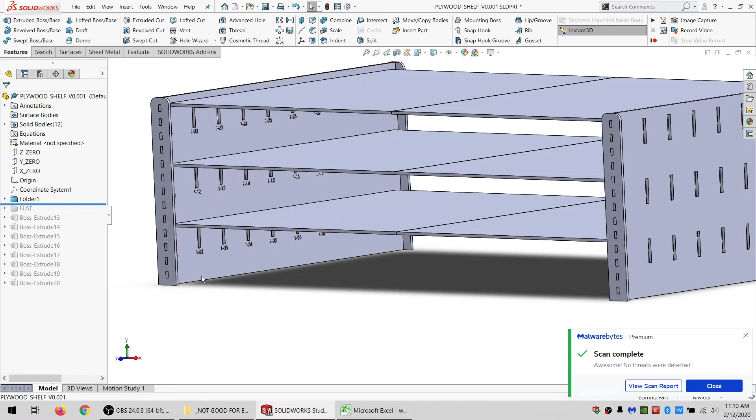is that all these little holes have wood slats that I bought from the hardware store. They sell them as quarter inch by 2 inch by 3 feet. Although there's so much variation in those that I actually had to adapt a little bit, modify my design. When I started measuring them, I realized there was really no consistency at all. Some of them would be off by 2 or 3 millimeters from one end to the next.

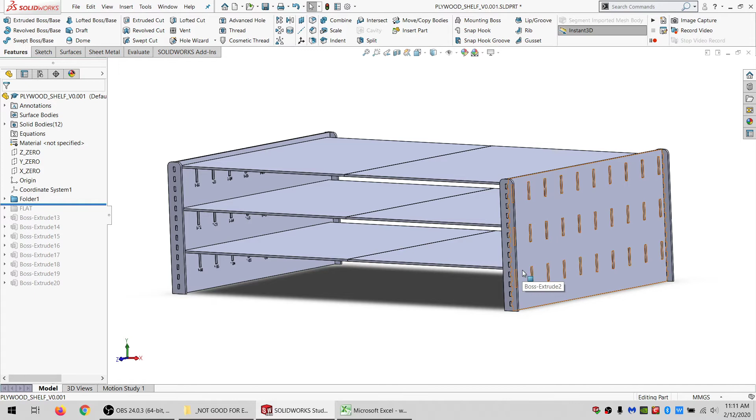And if I just put them all in there exactly the same, I'd have to make all the holes large enough for the largest one, which means the smallest ones would be super loose. And on top of that, the whole point is to create flat surfaces here for my plywood to sit on, and it wouldn't be a flat surface because some would be higher, some would be lower.

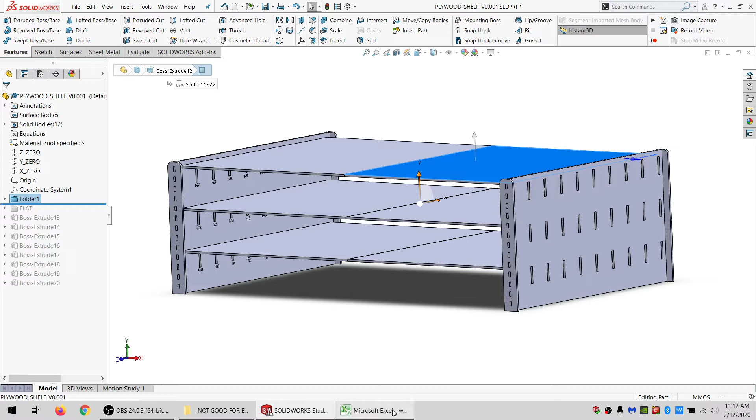So I went through with calipers, and basically I had 30 of these pieces, marked them all with a number, and marked each end. So each one would have, say, the number 5 written in the middle of it, and then on one end it would have a 1, and the other end a 2. And I measured the thickness and width of each end.

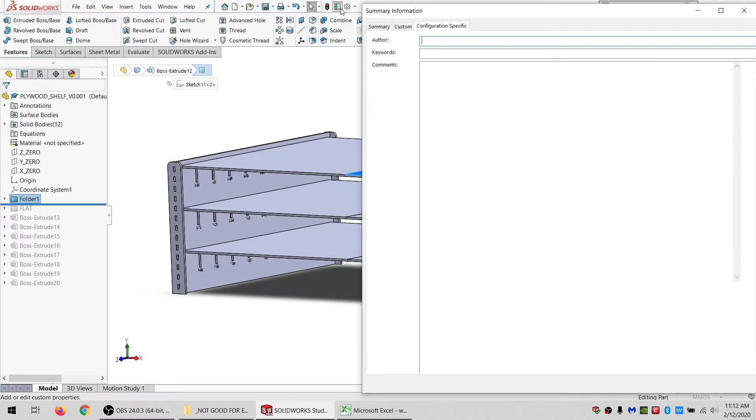And then I created variable names for each of those and stacked them up like this, copied that to Excel so I could easily copy it into SolidWorks. And now you know why I'm doing this as a review video. So I put all my variables in there.

I also added working height, which was the height from top to bottom of the existing shelf opening. Working depth is how deep the shelf was that I had to work with, although I don't even think I ended up using that. Kerf, obviously, just like the previous ones, so I could apply kerf in here rather than in the laser software that doesn't seem to ever do it right.

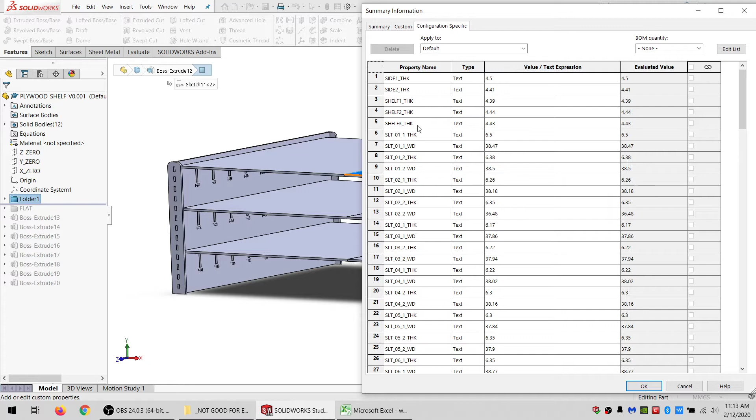And then I put thickness for the two sides and for each of the shelves, which are made of two pieces because my laser cutter isn't big enough to cut the whole shelf at once. And obviously, I'm trying to put pieces that are the maximum size for the laser cutter on top of the shelves, and the shelves have to be larger than that.

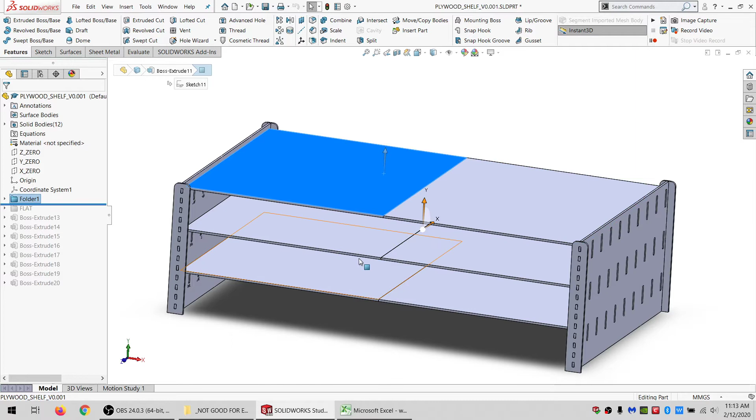So I had to go through my whole stack of plywood and find two that are the same height, or basically 3 pairs, each pair being the same thickness, which luckily I was able to find. And then the sides, it doesn't really matter if they're the same thickness as anything else.

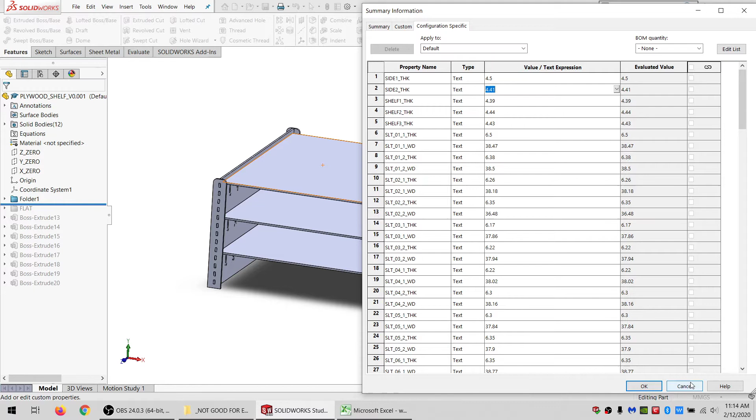So that's why I've got 3 different dimensions for shelf thick, and then for the side thick, where one side is considerably different than the other side, at least when it comes to a press fit like I've got here. So, with that said, start with the design review.

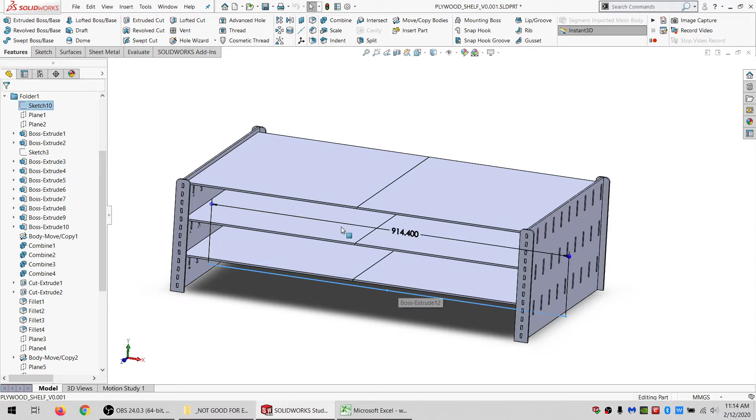First thing I did was I made a sketch. It was just a line that was the length of 3 feet, which is the length of the slats that I had. And I centered it on the origin and left the sketch. Used that sketch to make 2 planes right at the end of that.

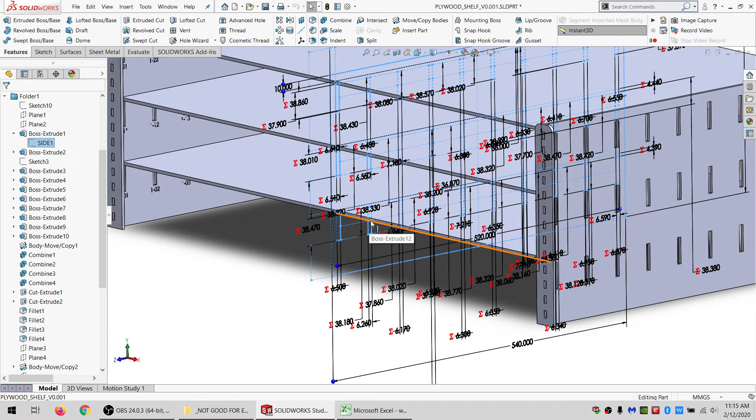Then I made a sketch which I called side 1, and in that you'll see all these little red equation symbols. So basically almost everything in that sketch is an equation. So this rectangle is based on the actual measurements from end 1 of piece 1. This is end 1 of piece 2, end 1 of piece 3, and so on all the way up to end 1 of piece 30.

And between each of them, I put construction lines. The first one I did a midpoint constraint on this line here and made it horizontal. And I did that for each of the 3 levels. Then the rest of them I just did collinear and equal constraints. And I did that for all 3 levels as well. And that locked everything down.

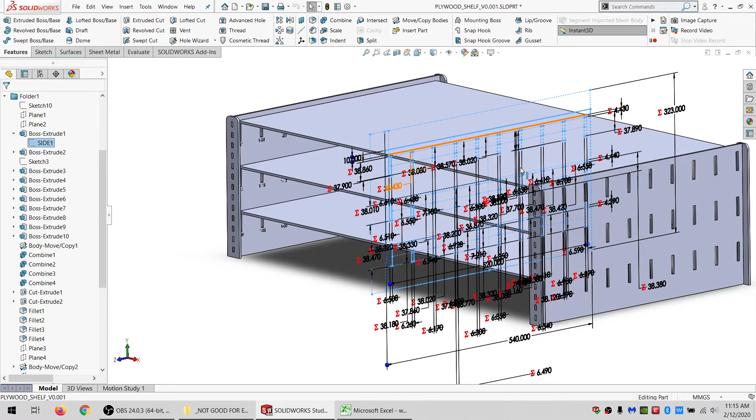And then I drew a rectangle around the outside of all of it, which was 10 millimeters out, which gives enough meat that I don't have to worry about it cracking if there's a slight void or something in the plywood, which sometimes you run into. I'm making relatively big pieces. I don't want to make them twice, and I don't really care about how they look, so I was using the remnant scraps that I don't normally use that are full of knots and imperfections, so I figured 10 millimeters, give it a little bit extra safety.

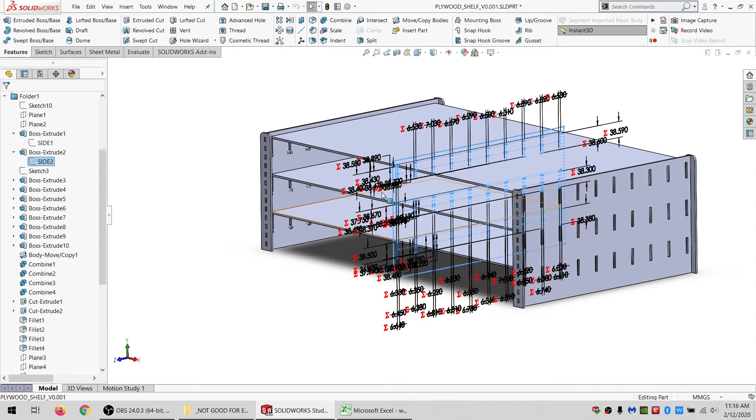Then, on the same plane in the middle, I made a sketch that I called side 2. Did the same thing, only this time it's board 1 end 2, board 2 end 2, board 3 end 2, and all the way up to board 30 end 2. And I just copied the same border across as well.

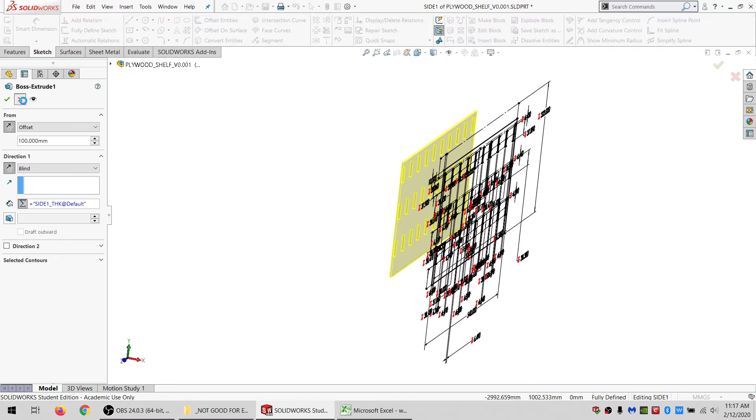And each of these, if I can open it, I didn't bother putting them on the original sketch plane, or the planes that I made out here before, because they're not actually going to end up there. But I didn't want to be right on the center plane, because then they'd be on top of each other. So I just offset them by 100 millimeters and adjusted later on. And of course it's extruded by a variable, because at this point I hadn't actually measured the thickness of this plywood. And I did the same thing in here, except this time I offset this way instead of this way for the first one.

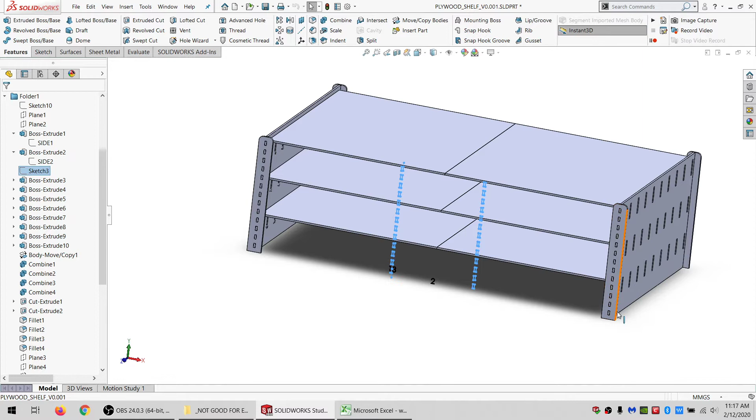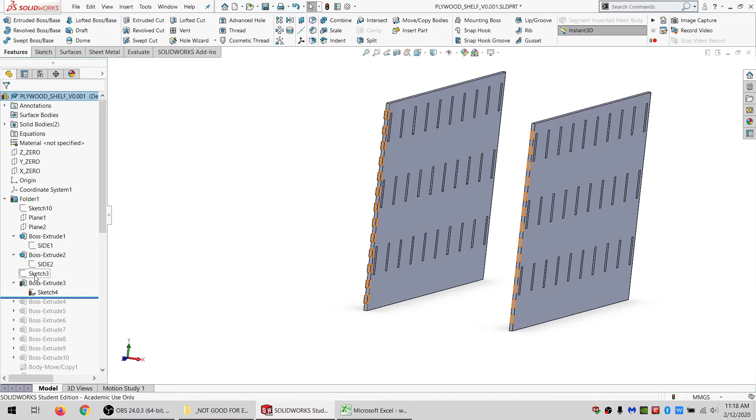Then I drew in these teeth, I guess you could call them, for each of the 2. Let me roll back to there actually. So I drew in the teeth, and I didn't extrude them, I just drew them in. Then I made a new sketch here, and I converted this sketch, and then I was able to just do a select like this inside that sketch, remove the teeth over here, these teeth, and do my extrude boss.

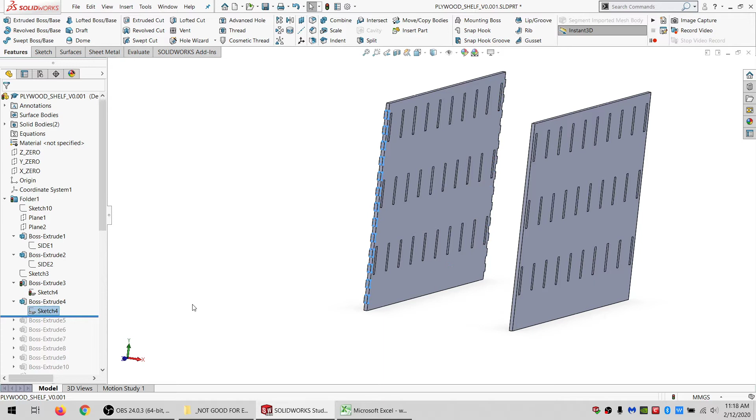And then I use that same sketch again, so they're both sketch 4, but this time I want it to be on the other end, so I just said from this surface, which I picked this end surface, I flipped the direction around so that it would be heading outwards, and then I just did it by the same thickness that this was done by, and this first panel was done by as well.

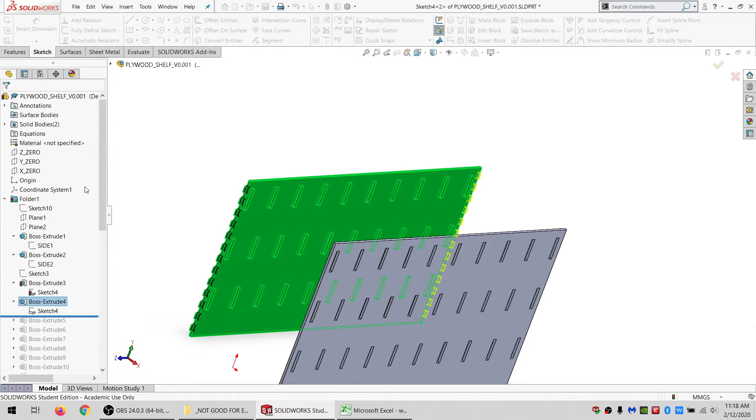Next step was I made a sketch on this surface, and I converted this sketch, and I deleted these so that only these remained, and I used that to extrude out these teeth. Then I reused that sketch to extrude out these teeth just the same as I did on the other side.

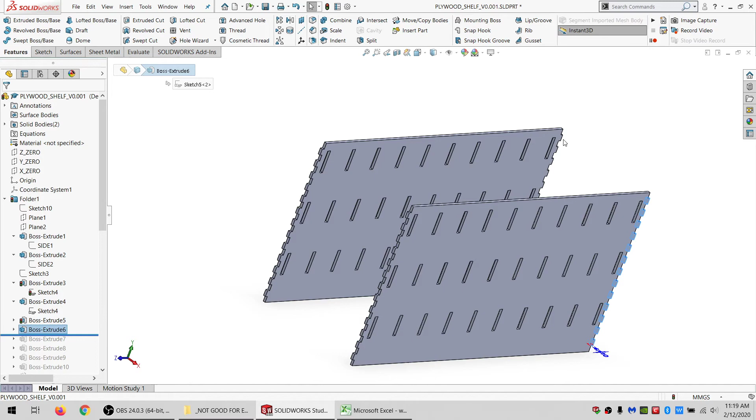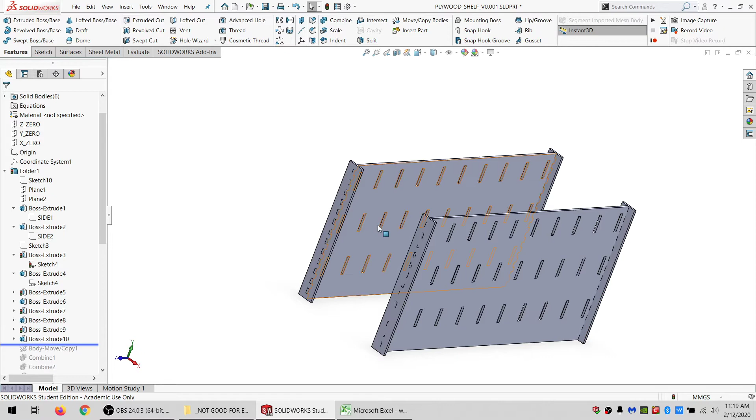From there, I drew in a rectangle at the end. This doesn't have any holes in it, it's just a simple rectangle, and it's the same thickness as this piece. Then I did the same thing on the back, and I did these two as well. So these are all just rectangles on the ends so far.

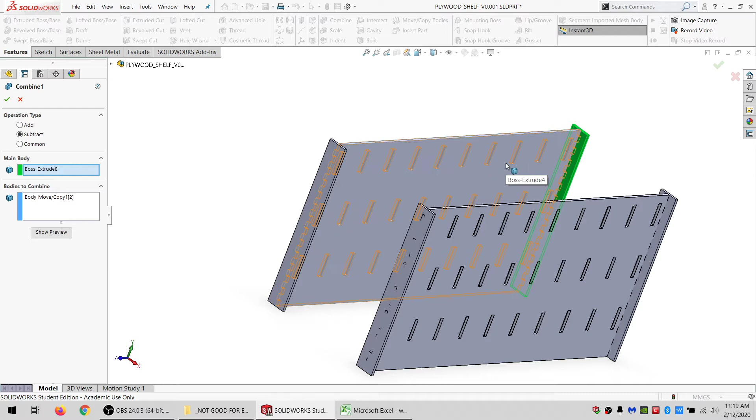This body move copy was - I just made 2 copies of this and 2 copies of this. The reason I did that was so I could use combine subtract. So I use this combine feature, set it to subtract mode. I said I want to start with this and subtract this. Then I did the same thing here and here and here - started here, subtracted that, started here, subtracted that, started here, subtracted that. By doing that, I make the holes that the teeth match up with.

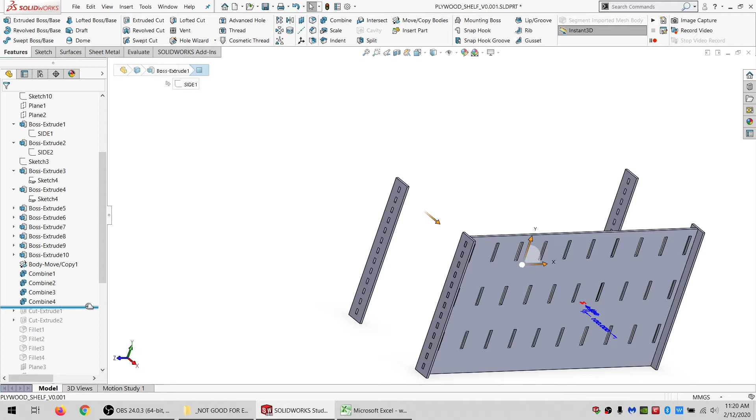There are other ways to do that, of course. That was just convenient. I probably could have reused the sketch, but sometimes you think of things afterwards. This was just the first thing that came to mind, and it worked, so whatever. Let me show that what I did again.

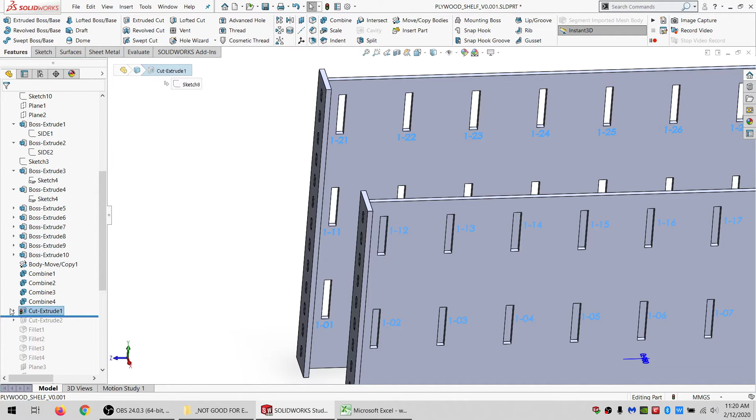So this one is - I wanted the numbers of all the boards as well as the ends. So this is board number 23 and 1, and I made a pretty relatively complex sketch to do that.

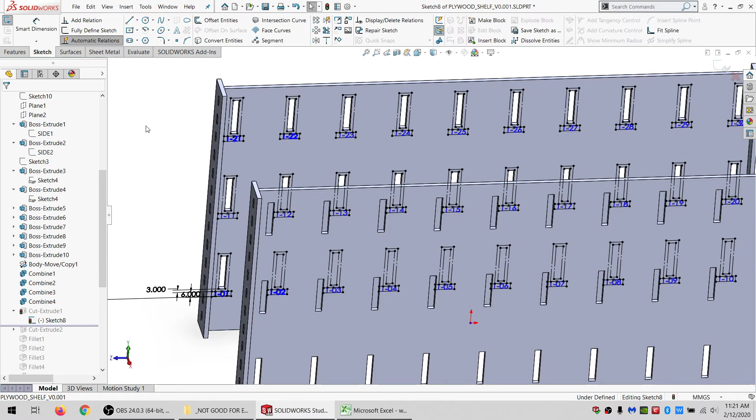I probably could have slacked off and just used a pattern of this rectangle, but instead what I did was a Convert Entities. I clicked this face, and then clicked select all inner loops. Then I selected all of those and did an offset entities, offset by 3.

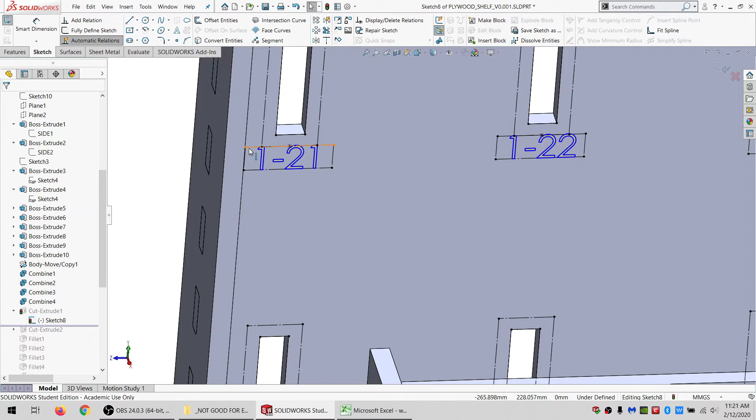Then I put a midpoint on each of those. Let me select this - on this line here, I put a midpoint on all of those. I made 30 identical rectangles like this and did a midpoint constraint there as well. Then I put my text down to the bottom line of each of those.

To set that text size, since I didn't want to set it literally every time I made a new text entity, I just went ahead into document properties and annotations, and set the text size in there. That way it defaults every time.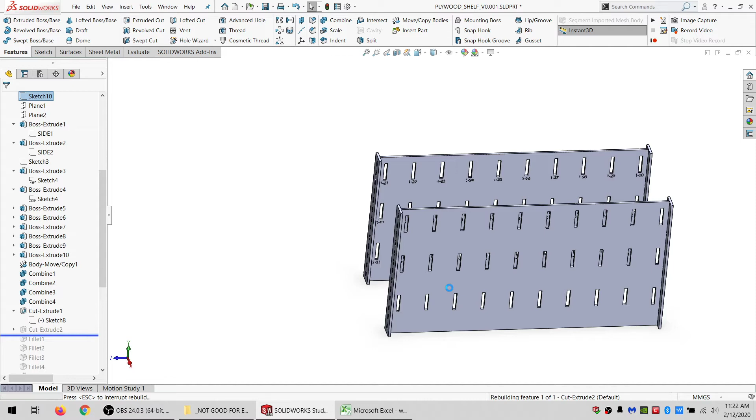So that let me cut out all those letters or numbers, and then I did basically the same thing on the other side. So when I was assembling it, I had all the numbers engraved right on the panels, and it would have been hard to mess that up unless I was actually trying to - thankfully I didn't.

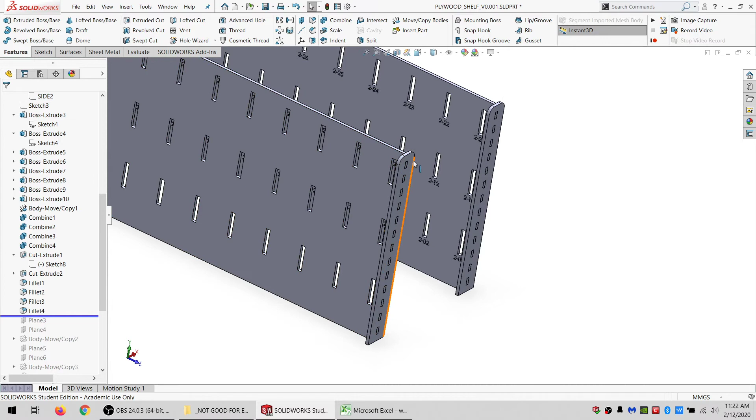Then I just filleted the top edges. Not really necessary, I suppose, but why not?

Then the next step was kind of sloppy, but it works. So remember back here, I put these planes, and those are the end points of the slats that I bought from the hardware store that I don't want to modify at all. I don't want to cut them or do anything with them, I just want to use them.

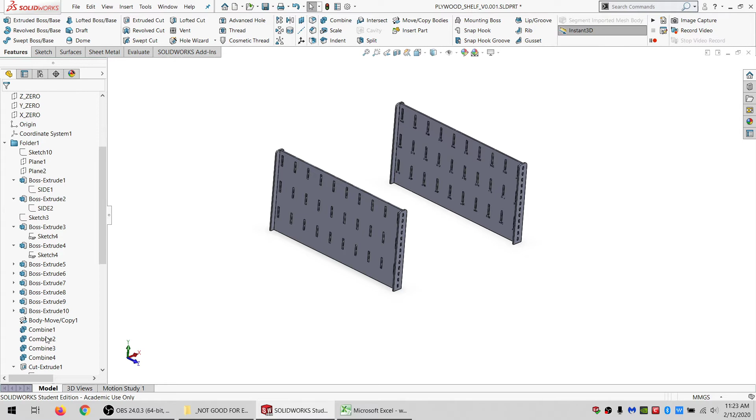So I made the planes - I made these 2 planes that were based on where this was. And I used those planes plus the body move copy to move it in a straight path. The last constraint on this body move copy was to constrain this face to this sketch. Then I did the same thing again for the other side.

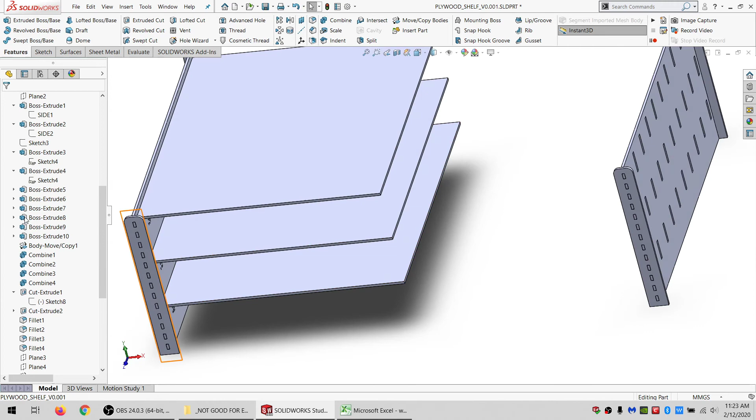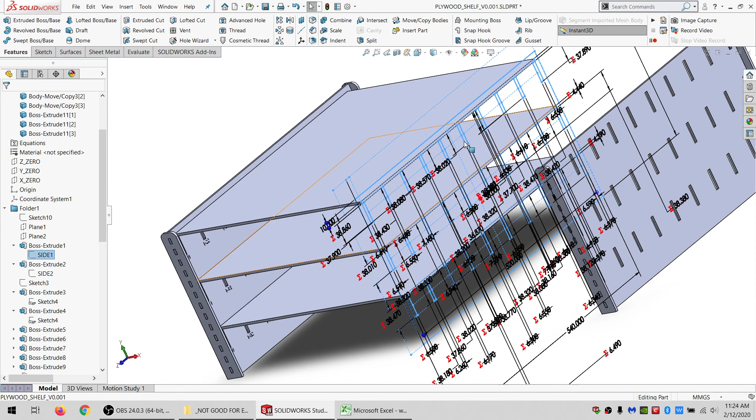Then I went back to this original sketch - well, I made a sketch in this plane. And from this original sketch, I took this line and this line, this line and this line, this line and this line, and I converted them. Then I drew in lines here, here, here, here, here, and here, just to close up those rectangles.

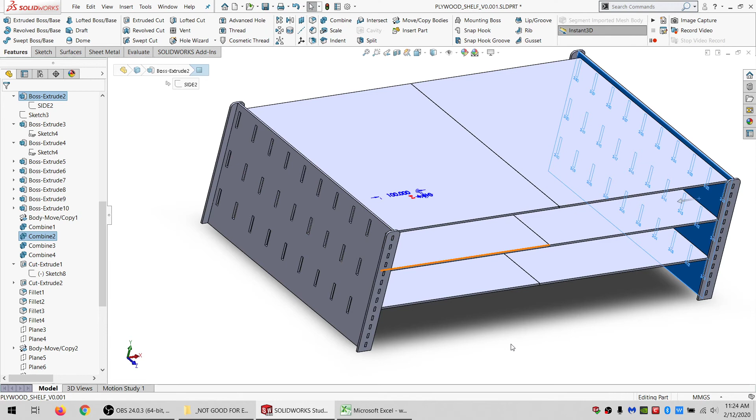And I did an extrude boss up to here, and that's how I got these 3 surface plates. Then I reused that same sketch and just extruded the other way up to here. That way I get my 6 pieces from a single sketch.

Then I made a new sketch on the bottom of these, which was just a line and a line. Then I made 2 center point rectangles that are centered on each of these lines. And I put my text on here.

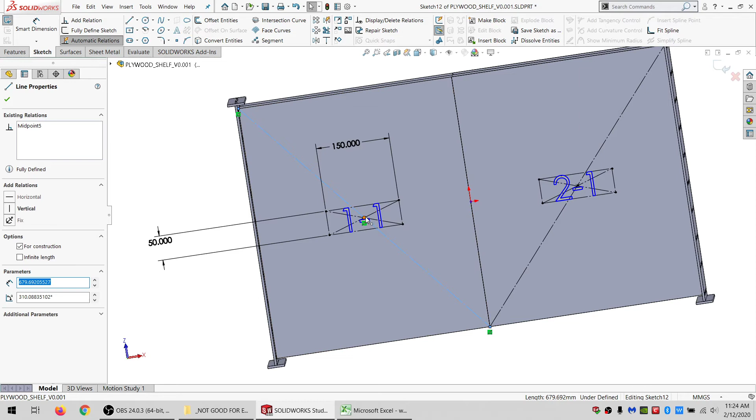This text is taller, but I only needed to do 2 of them, so I manually just changed it to a text height of 50. And I did the same thing for this level and the same thing for this level as well.

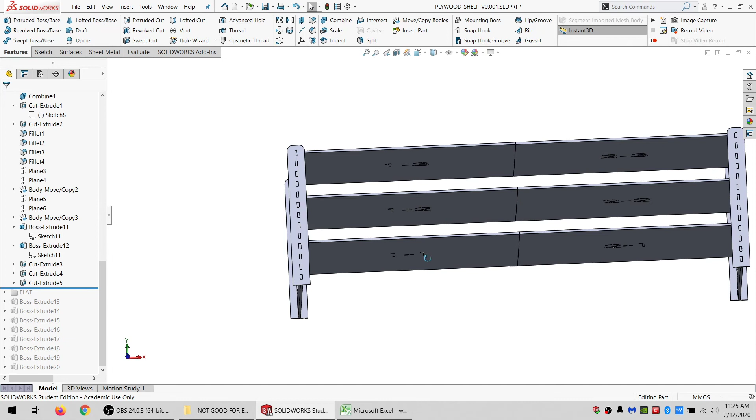So I had numbers engraved on all these pieces, this piece and this piece. And then these end pieces, I just remembered when I was cutting them that these 2 would go with this part. And as soon as they were cut, I hammered them together because they're designed as a press fit. And same thing over here, as soon as they're done cutting, I just hammered them together.

And then I don't really need numbers because they're basically one part at that point. I put a little bit of glue too, but there probably was unnecessary.

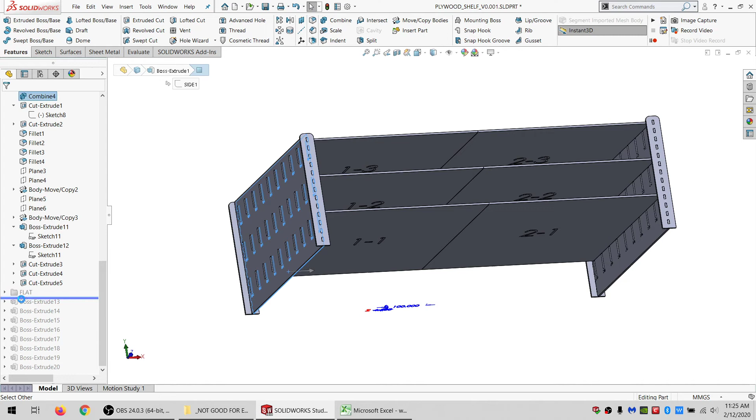Then, because this is laser cutting, I did a flat layout. This is much larger than the capacity of my bed. Actually, I had to do this as 8 separate cuts. Each one of these was 1 cut, and then this set of 3 was 1 cut, and this set of 3 was 1 cut. None of them were as big as the whole bed, but any 2 of them would have been too big for the bed.

And then I just started doing my offsetting, my kerf offsets. Because again, my laser software does have sort of kerf support, but anytime I've ever tried to rely on it, it's messed things up horribly. So I don't trust it in the least anymore. I just use SolidWorks to do it.

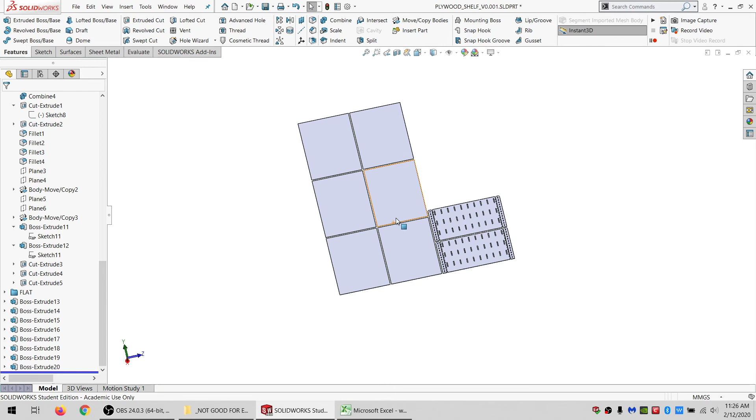And then there's one more thing that I think I put in here. If I rotate around - so what I did here, just because these are not like a full engrave, I just did these as like a cut, but a very high speed cut, so it didn't cut all the way through, but it just left the mark.

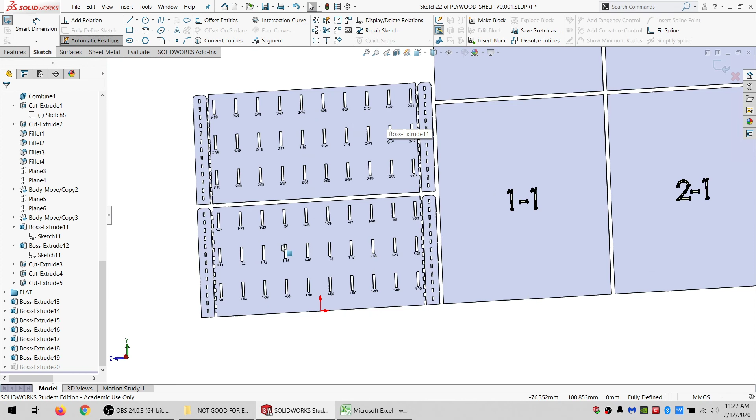Which for these it's fine because they're relatively small and close together, and it looks right. For these, it would have been too light. Still probably could have read them, but it would have been very light. So what I did was I used convert entities.

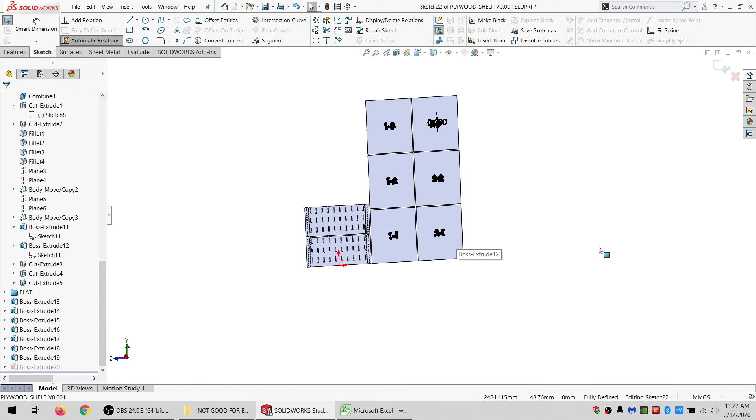So I went convert entities, and I selected this face, and I said select all inner loops and click check. I did the same thing for this one, for all of them. And I just selected everything, and I said offset.

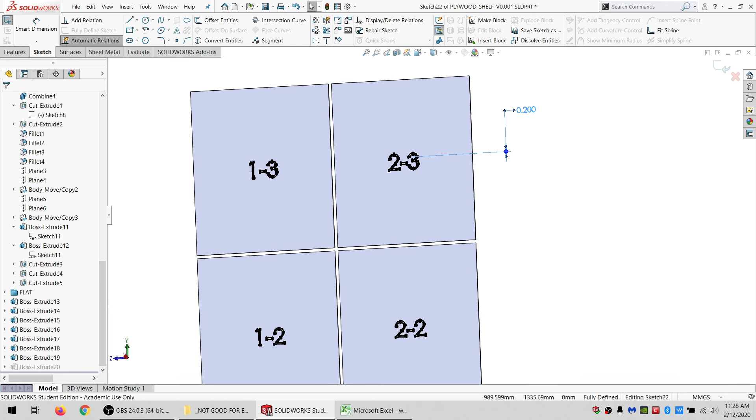And I typed in 0.2, I believe, and clicked reverse. By doing that, oh, I can actually see what I typed in - 0.2, yeah. So by doing that, I got an extra. So this is the original cut, and this is the offset inwards. And I did that for all of them.

By doing that, I did an extrude boss again. So if you zoom way in, you'll see that now there's basically 2 lines making up the numbers. And that way, when it is doing that high-speed cut that's sort of an engrave process, it does it twice right next to each other to make it a little bit darker.

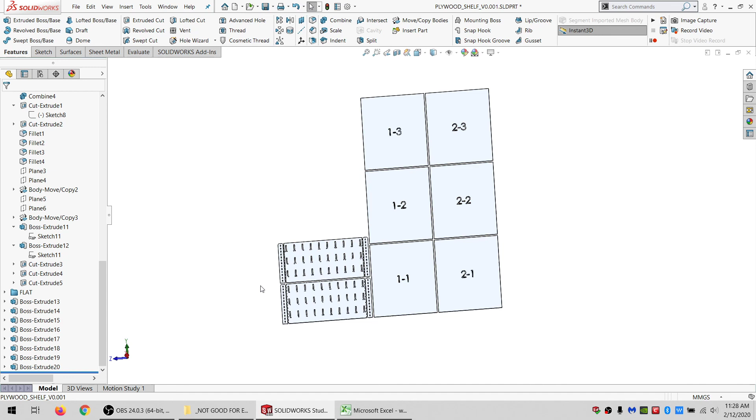So yeah, that's the whole design process. I went ahead and did all the cutting, and couldn't get that done till late last night because it was too hot to use the laser cutter most of the day. This morning I got the shelf all assembled and put some stuff on it, and yeah, it's working out pretty well, other than now I'm thinking I might want to make another one.

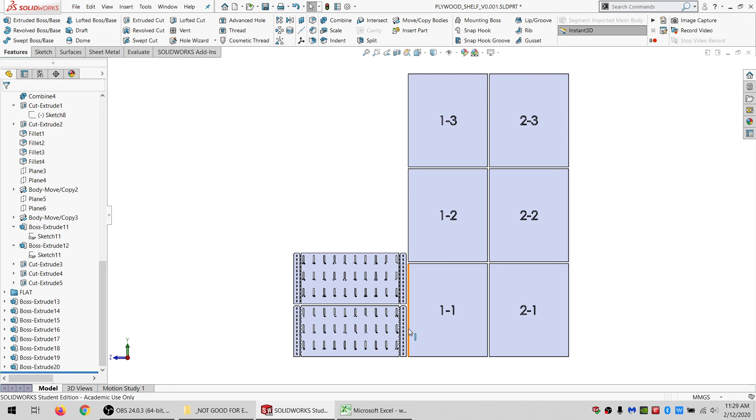Actually, I don't know if I actually will, but I've got this available, and really the biggest trouble is doing all the measuring again. That's the main thing that's discouraging me from making another one.